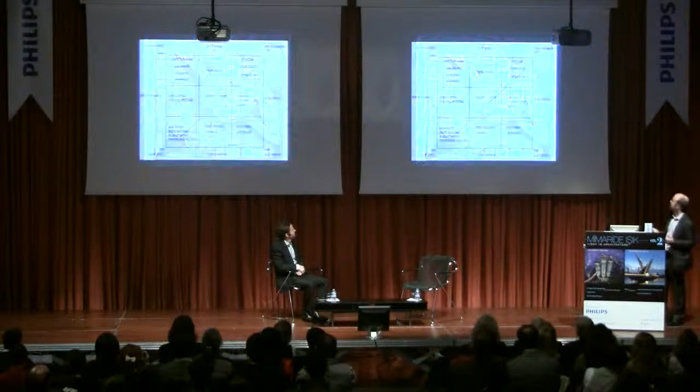With all of our projects, we want to get into a local mindset and design a building or group of buildings that is of its place. The first principle of designing in India is to create according to Vastu, which dictates where the energy and the water may be situated to create harmony, wealth and well-being in your living space, and ultimately can dictate where the rooms go in the house.

This obviously is not so easy when you have a project of 3 towers on a constrained site and have more than one apartment per floor. We're talking about multiples of apartments in some cases, from 3 or 4 apartments in the lower levels of the building to single duplex and triplex apartments at the top. These were some of our first ideas about how we might locate these things.

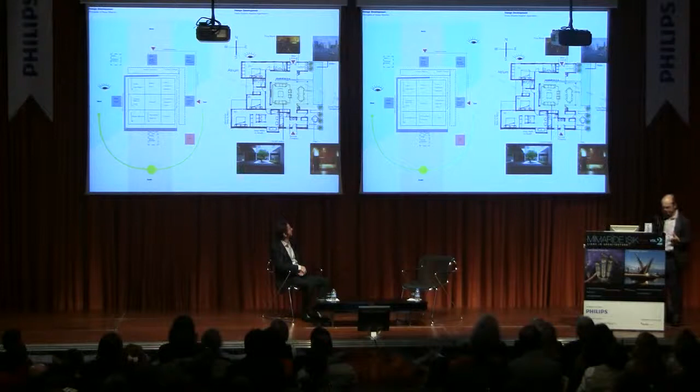Another major influencing factor for the design of the building was this idea of the courtyard, or the Indian palace, and shade. In India, shade is as important as light. There is obviously very strong daylight all day long, all through the year, so we have to be very careful about how we control that.

We do that primarily through the use of passive means, as in overhanging balconies. They're very deep balconies which create a lot of shade before you actually get inside each individual apartment.

However, whilst the traditional Indian palace might be inward looking to a courtyard, these three towers are very much outward looking to the panoramic views of Mumbai, with the sea visible on all sides from the upper reaches of the tower. So our client was very specific and asked for balconies to every single living space and all around all three towers.

We took the idea of the courtyard, or the heart space of the palace, and that became the living space of the apartment. In that way, you can come directly straight out of the lift and into the living space.

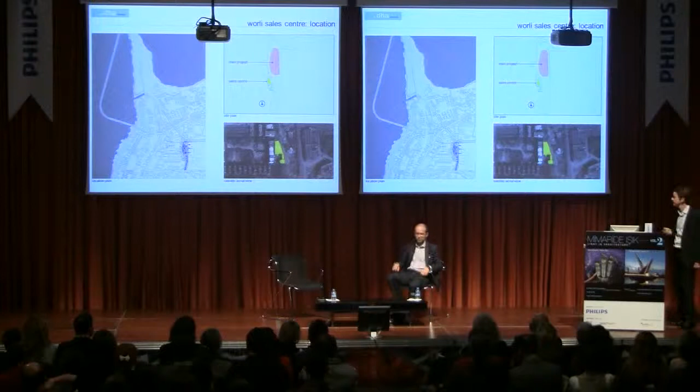We begin with a simple elevation. So you enter the sales centre here in this triple height space. It's 13 metres up to the roof, and the long facade here is 8.5 metres.

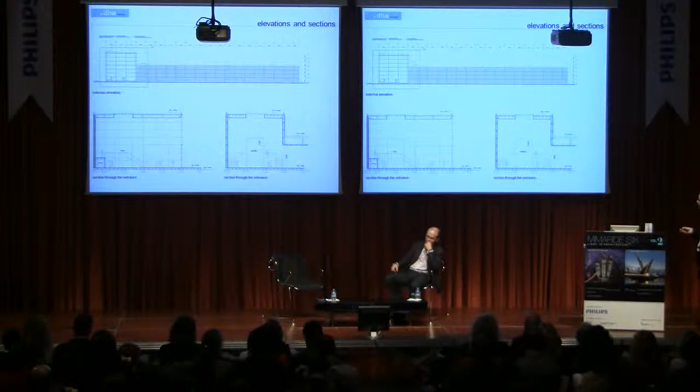The section on the left-hand side indicates the model that Ricardo spoke about. This model really is huge. The entrance wall is a glass curtain wall, and you walk into the space and you see the model. The original designs also indicated a skylight at the top to introduce some natural light.

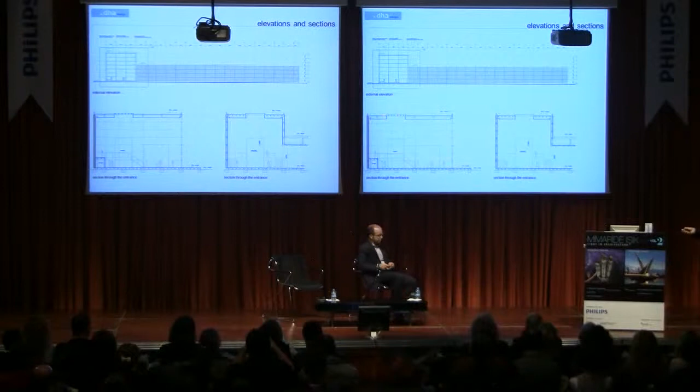In plan, the landscape designer introduced this avenue that you come along, and you enter into the sales centre and this space. This is the triple height space with the model, and you can walk around on this mezzanine area here before continuing through some semi-private meeting spaces down towards the show flat.

The show flat is a 5-bedroom apartment. This is a section of a typical floor plan on one of the residential towers. It sits on a pool of water in the sales pavilion that extends underneath the curtain wall cladding to the outside.

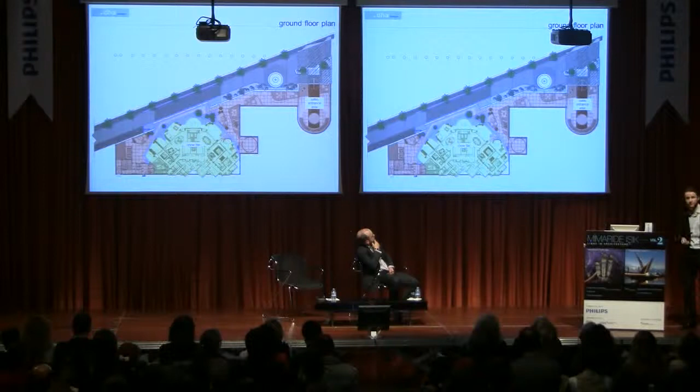The client was very keen to introduce this mezzanine to allow people to walk up behind the model, and the original design of the skylight. Now, one of our concerns was for this wow factor to really have its momentum, we need to really control this environment. The skylight was proving difficult for us as a lighting designer, as was the glass entrance wall, which faces east as well.

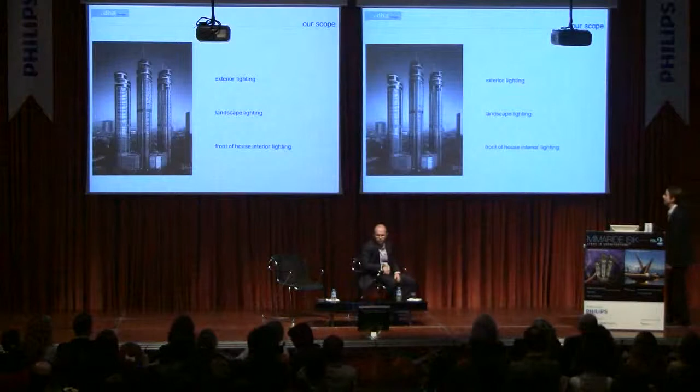If we're moving on to the main project then, the last part of my presentation, our scope now includes the exterior lighting of the project, the landscape lighting, and the front of house interior lighting of the public spaces, the amenity floors. So where do we start with the exterior lighting on a building of this size?

It really is going to become iconic on the Mumbai skyline. Ricardo's mentioned some of the strategy that we're taking for the facade. We're going to try to link the top of the tower to the bottom in some way using light. You can see here, this is the podium car park area, equally with an interesting cladding that we need to treat.

So, 25 years ago, you'd light this building quite differently, or you'd treat what we used to say the bucket of light approach. You throw a bucket of light at a building and you hope some sticks. Those days are long gone. What we're trying to do now is incorporate the lighting within the actual architecture, within the cladding itself.

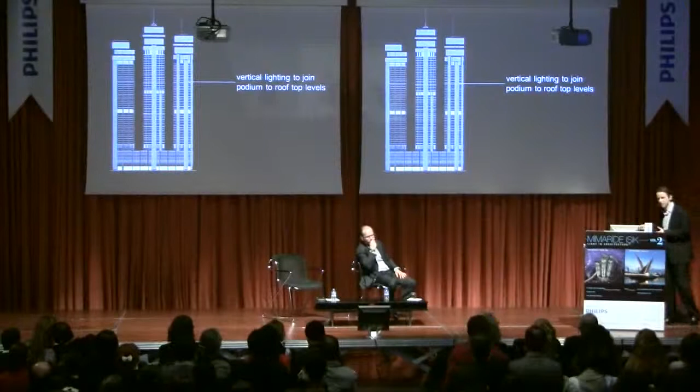Also, this being a residential tower, you need to be much more mindful of the user as well. So the lighting that we're proposing will have no effect to the users when they're actually in their apartments. They won't be able to see that at night. So we propose these vertical lines of light going from the ground level all the way up to the top.

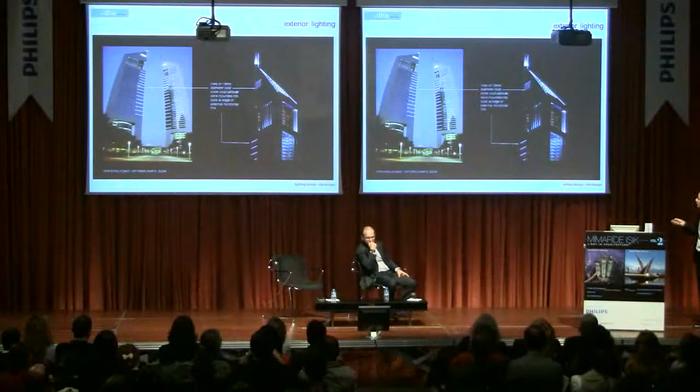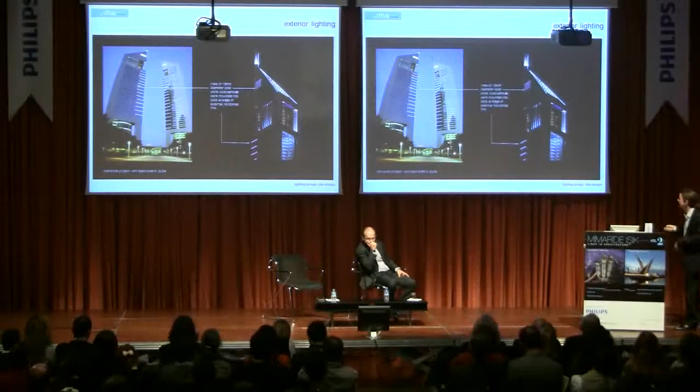We've done this before. We did this in Dubai in 1998. This is the Emirates Towers, where we included cold cathode lighting in these fins, these horizontal fins on the edge of these two towers. We used a mixture of a cool white and a turquoise, and the effect is quite stunning. Even 15 years later, against the ever-changing Dubai skyline, it still has quite an impact for a very little amount of light.

And in plan form, these are the locations of the vertical lines of light on each of the three towers. This is the technology.

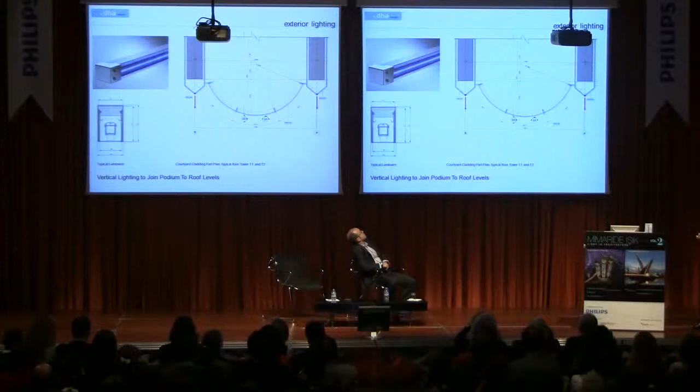The product here I particularly like. It's made by a company called Insta from Germany. It has a very robust stainless steel housing and a very good diffuser across the front. The stainless steel housing is ideal here. The LED unit itself is almost quite independent from daytime thermal expansion that could affect the luminaire directly.

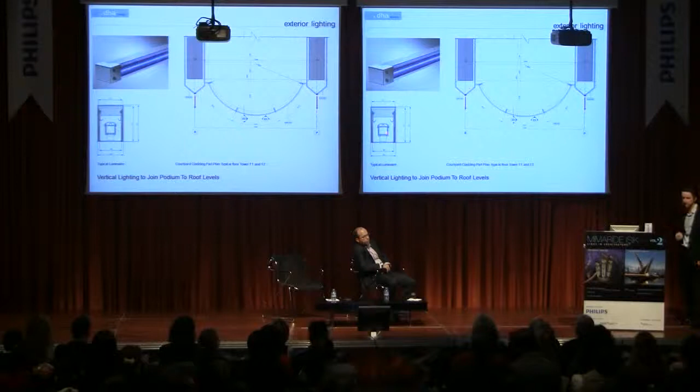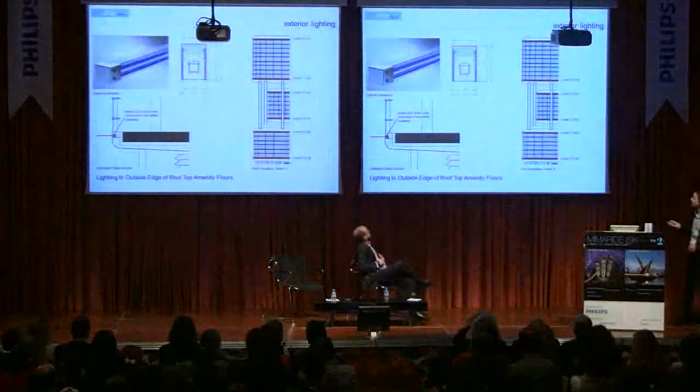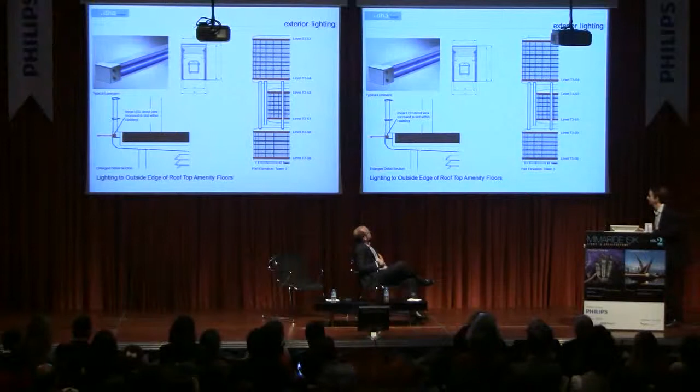Now at the top, for the amenity floors, this sort of stacked architecture, we would like to continue our line of light by just accentuating the shape, the top and bottom. It's like a sandwich almost that we're creating here using light. The same fixture can be used in a faceted form to work its way around the curves. You can see here, it's just the top and the bottom creating this visual strong line of white light. In plan form, the extent.

And then we go down to the bottom, the car park itself, where we want to consider also how the building is perceived at a more human scale as you're driving through towards this building. The appearance of the building at the top with the rings and the vertical lines of light is going to be seen from quite a distance, but we've also got to consider the appearance as you get closer to the building.

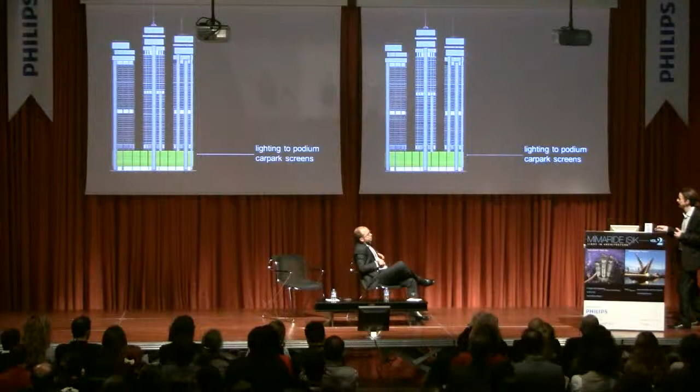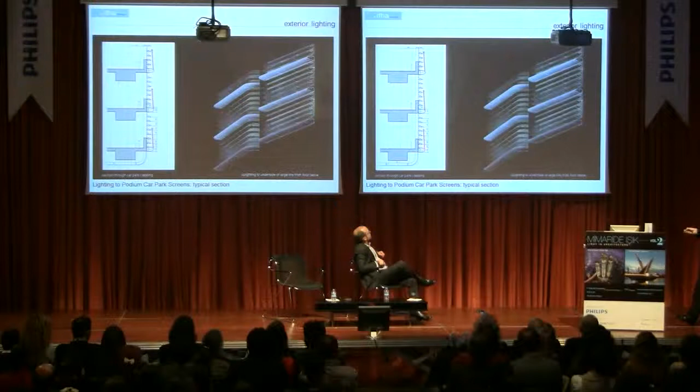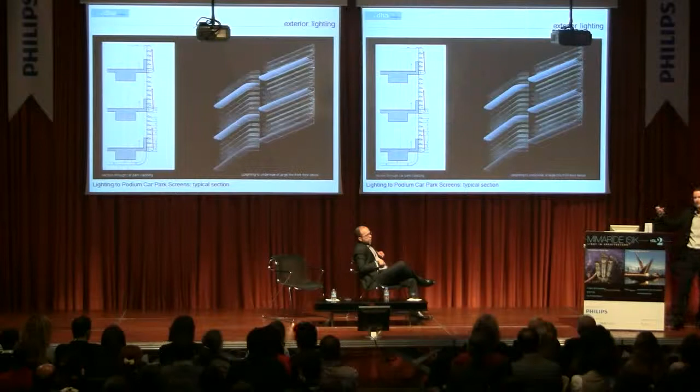The cladding that we have to work with has a bullnose detail at every level, interspersed with darker aluminium louvers. We're proposing to conceal small sources in the tops of each of the bullnose to light the underside of the bullnose above. Now with LED technology and the quality of the lenses, we can use a 10 by 60 degree lens on a very small luminaire to get a very wide and narrow fan of light that can achieve this.

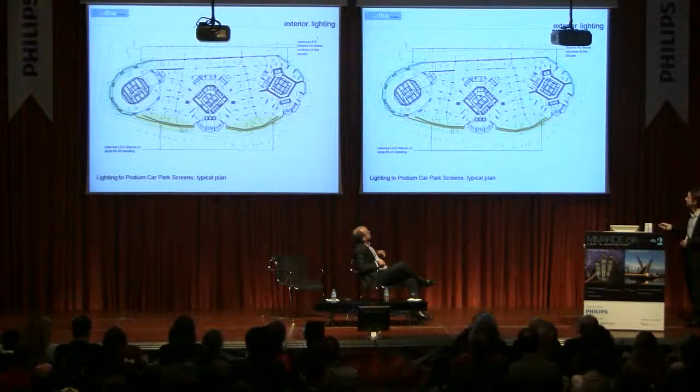As the extent of the proposal for the car park cladding, shown in yellow, potentially to be extended around to the two sides.

Our scope includes the landscape lighting on the podium. We've suggested some ideas for illuminating the pool areas and the seating areas. This is a landscaped area that's shared between the three residential towers.

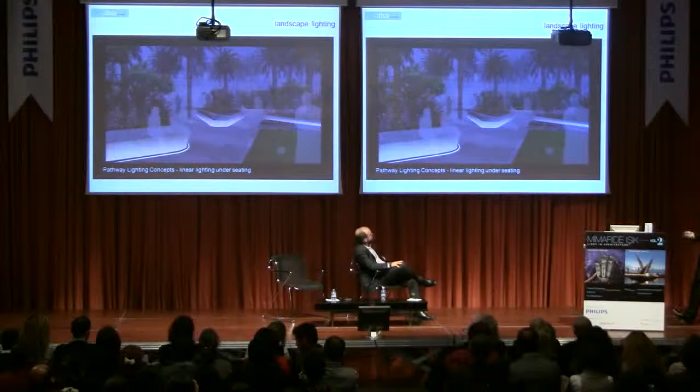And finally, on the landscape lighting on the podium, the landscape consultant has introduced a series of landscape islands with a seating area around each one, which we'd like to express with light using a linear source around the base of each of the seats.

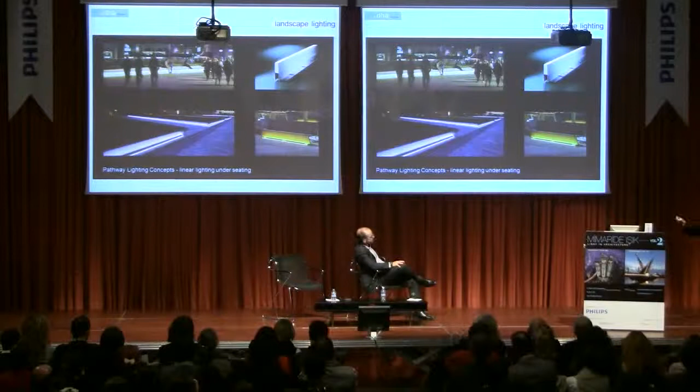I'll show you a couple of examples where this has been achieved very successfully. Here's the piece of kit. It's a very robust piece of kit. It's a stainless steel channel with an excellent LED source that is totally encapsulated and diffused, so you get a very soft line of white light without seeing the individual dots of the luminaires.

Moving on lastly to the interior spaces, I just use this as an example due to limited time. This was the lobby of Tower 2, an older version to the one that Ricardo showed you.

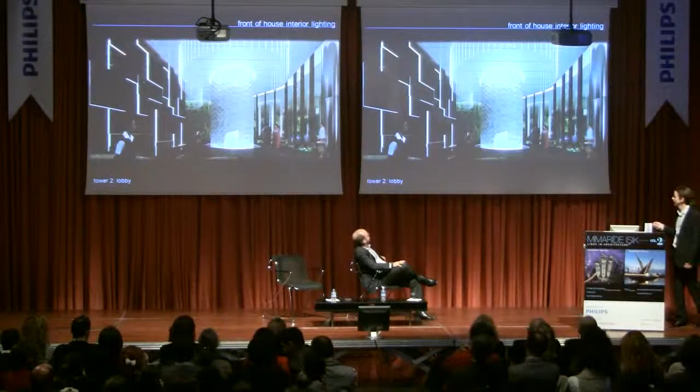Working up the scheme with Foster's office, we have a transition here so that we can concentrate light on the feature wall. This is the core wall, and it's always going to be a visual feature into all of the lobby spaces of the three towers, simply backlit with a little strip of light visible here.

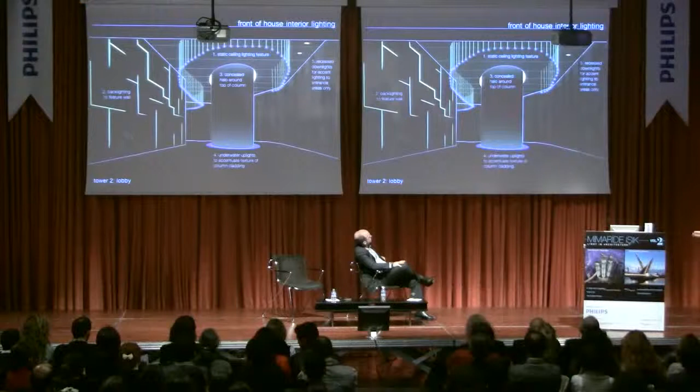Your eye is really drawn to this sculptural feature in the center, and the lighting around the column itself. For this sculptural feature, we took inspiration from the fabulous O2 Media Cloud installation in Frankfurt a few years ago. This consists of 28,000 acrylic rods, each with an LED pixel at the back that edge lights the rod, letting you control the intensity and color of each acrylic tube. We'd like to apply that type of science to the more sculptural areas in the lobby.

So in conclusion, I'd like to summarize with three points. DHA Designs, we have 24 years of experience now, formed in 1988, with lighting projects across the world, and we hope the Worli project will be as successful over the next few years, working with Ricardo and the team at Foster's. The sales centre allowed us introduction into the project through a long route via an interior designer we work with on one of our projects in Macau, coming full circle. It allows us to use theatrical lighting techniques with a stunning interior design as well.